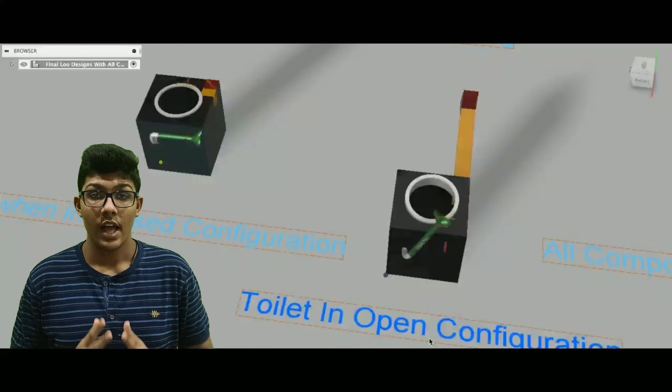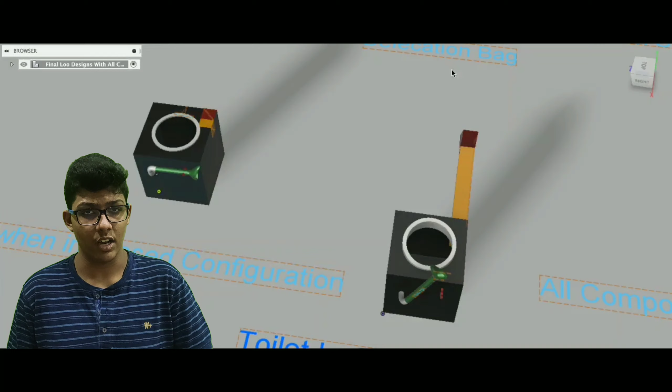I'm Satvik from Hyderabad, India, and this is my design, the in-house lunar waste disposal system. An innovative, austere, novel, genial, technologically advanced, yet simple to use attempt to design an efficient waste disposal system for future lunar manned missions. My design consists of mainly three units: the defecation unit, the regurgitation unit, and the urination unit. Now I'll detail them one by one.

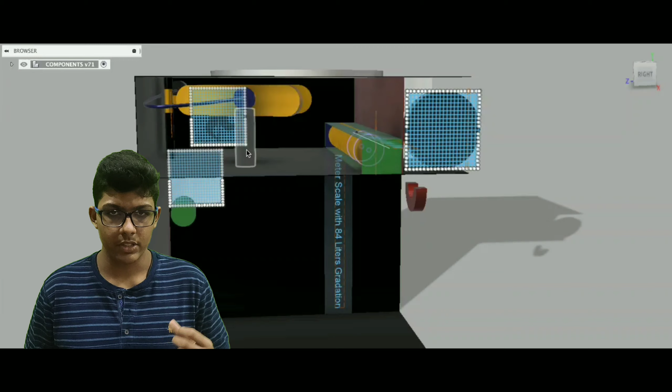The defecation unit consists of an in-house vacuum sealing technology to vacuum seal the defecation bag which is stored in that, and to make it compact, easy to store, and also keep it from any harm such as pressure, added atmospheric pressure, etc. The defecation unit, as you see, has a major component that is called the vacuum sealer. The vacuum sealer has some important parts like the vacuum nozzle, the seal initiation button, the retaliatory spring, the master arm, and the redundant arm.

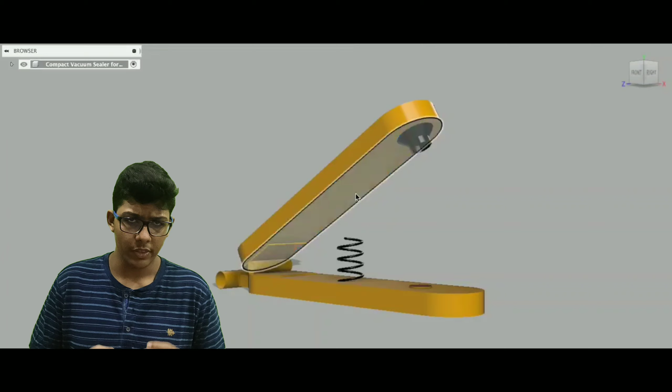The main function of the vacuum sealer is to vacuum seal the defecation bag, which is used to store the contents during defecation, and then make it compact and suck the air out so as to make it easy to store and as well as keep it away from any harm as detailed earlier.

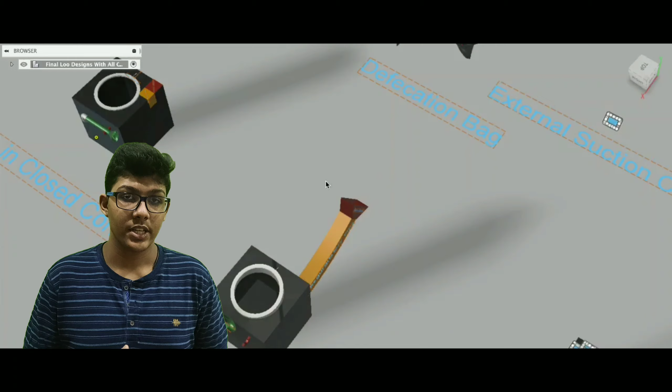Now let's move to the regurgitation unit. The regurgitation unit consists of a regurgitatory pipe and a sepsis opener and a storage box. The sepsis opener is attached to the regurgitatory pipe using a film release liner, almost like putting double tape on a wall. The main reason why a sepsis opener opens in that way is to accommodate the mouth of the astronaut regurgitating so as to not allow any spillages, and also make sure that it is closable and replaceable. Hence it has to be opened in the very same fashion shown in the pictures and in the 3D diagram.

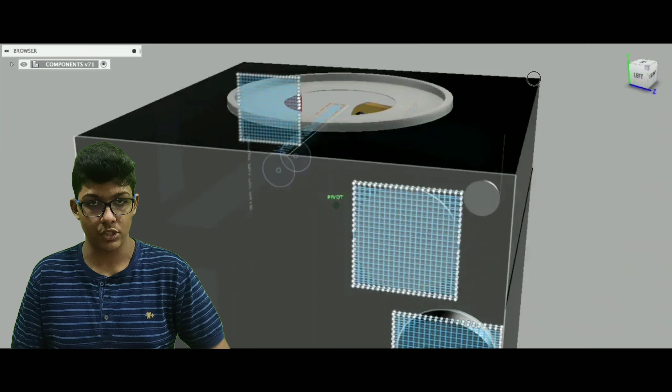The regurgitatory pipe opens directly into the storage box into which the regurgitated waste is stored, and then it has to be either extravehicularly disposed or stored inside the unit itself. Up to 3 packets can be stored inside the regurgitation unit.

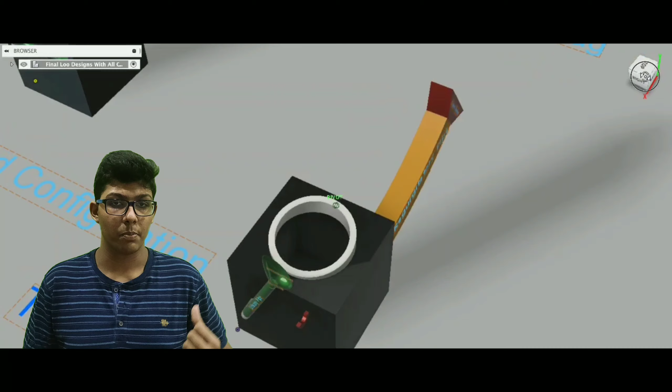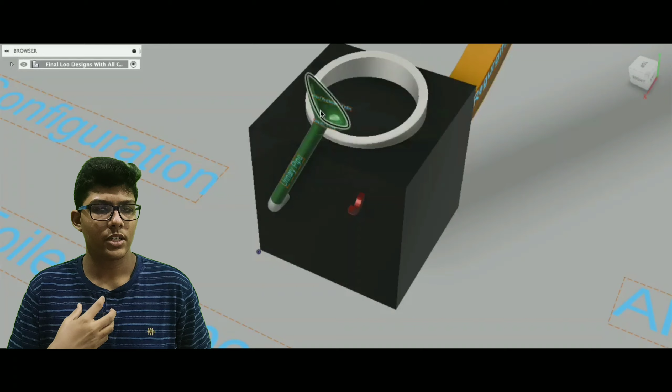Then let's go to the urination unit. The urination unit is the largest unit in my entire design. It consists of a urinary pipe, a urinary probe, and a urine stabilization unit. The urinary probe is basically a unisex probe, meaning it can be used by both men and women alike, and the probe does not need to be changed. However, it has an inner probe which has to be replaced after every use. It can be cleaned also, but I would suggest replacement because it might have certain microorganisms which might proliferate and endanger astronautic health. Hence, it has to be replaced after every use.

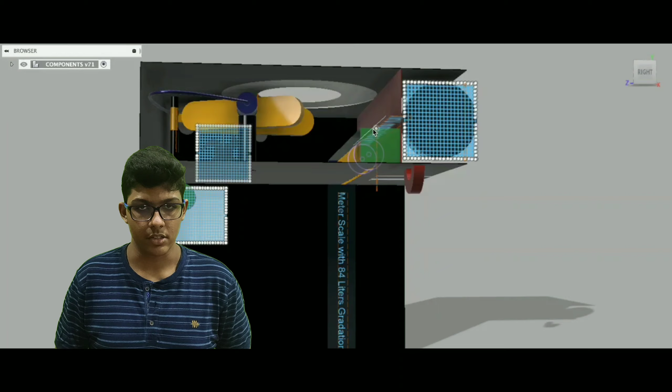The urinary pipe extends into the chamber. The chamber can store up to 84 liters for a 14-day mission. The pipe, as you see, has a wide part, which means that it can be extended up to 10 centimeters so as to make it more accessible and usable.

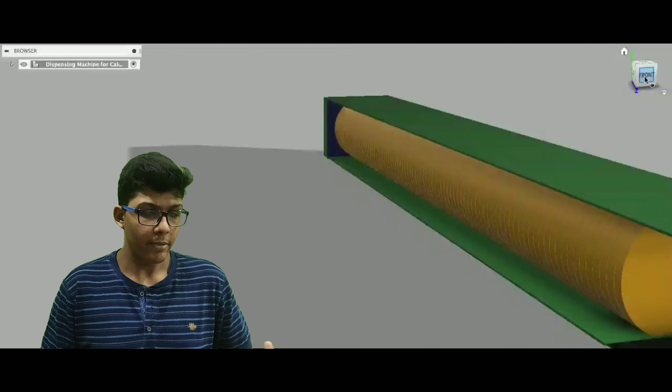The urine stabilization unit is an important factor because I have also cited it in the entire Word document that there is a study which says that calcium hydroxide powder can be used to stabilize active urine, thus killing any odor and also any contaminants in it. And it's recommended and mandated that 10 grams of calcium hydroxide be used for every 1 liter of active urine. And hence, keeping that principle in mind, the urine stabilization unit consists of 90 gelatin capsules which store at least 10 grams of calcium hydroxide in each.

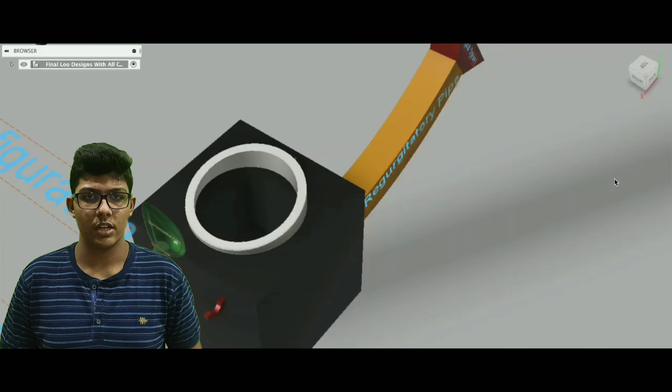The gelatin capsules were chosen because gelatin dissolves only in water, and since urine is 95% water, it is easy to use and also dissolves only in water and not any other solvent, thus keeping the contents inside it safe. The calcium hydroxide dissolves in the urine, stabilizes it, and also makes sure that astronaut health is safe from any biological hazard.

Having detailed each and every part of my entire design, the total weight of my design stands at just 15.028 kg. And when I come to acoustic efficiency and power, acoustic efficiency depends on the fans because the exhaust fans are the only mechanical parts which produce sound. The vacuum sealer itself produces negligible sound.

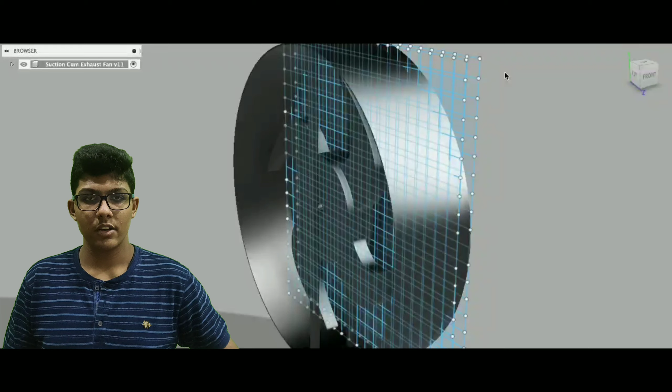The sound produced can be calculated by the formula which I have attached in the Word document, but it also depends on certain factors which have to be given by the fan manufacturer. Hence, I have detailed the formula below because it also depends on who is manufacturing the fan and what is the effective decibel power, etc.

The acoustic efficiency of graphene is very high, as I have cited in a study that graphene has robust acoustic shielding and acoustic efficiency, which means you don't need to add any other material or any inhibitant to make sure that sound is shielded, making it a very good acoustic shielder.

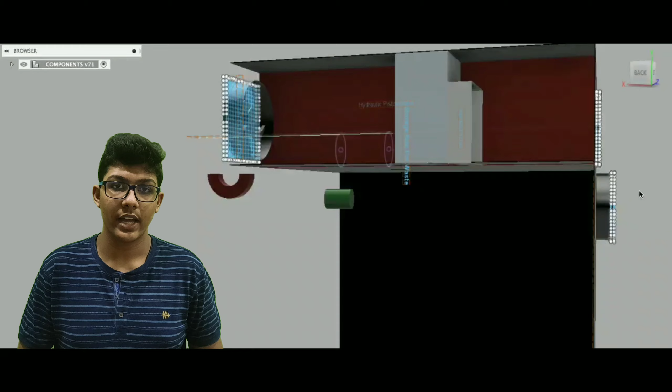Now when we come to the safety part, I have detailed it very well in the safety part of the submission form about how my design keeps safety as a major priority and also addresses safety issues like electromechanical hazards, biological hazards, chemical hazards, hazards caused by menses, hazards caused by urine, the defecation bag itself, diarrhea, etc. Hence you can also read it from there.

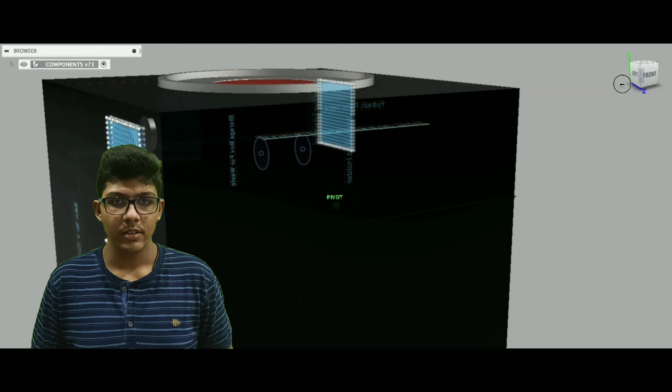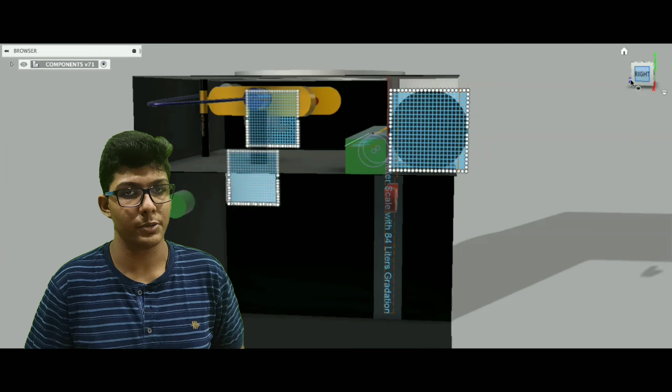Now I'll detail how my design works in microgravity and lunar gravity. Microgravity is defined as gravity which has very weak forces compared to that of the Earth's gravity. Now in microgravity, as we've observed, things expelled out float. Hence, to prevent that issue or to utilize it, I have placed 3 exhaust fans for each of the units. The exhaust fans are made of a plastic casing with a mesh which contains an active charcoal sheet reinforced between them. The mesh is the blue colored lines.

The urinary unit's exhaust fan is a little different because it protrudes to the outside and it is reinforced with a sheet of Gore-Tex from the inside. The Gore-Tex's main function is to allow only air and not liquid into the fan, thus preventing the liquid from seeping into the fan and also preventing any electromechanical failure. These fans produce suction which pulls down all the objects towards them so as to make sure that anything expelled falls down directly into the toilet itself.

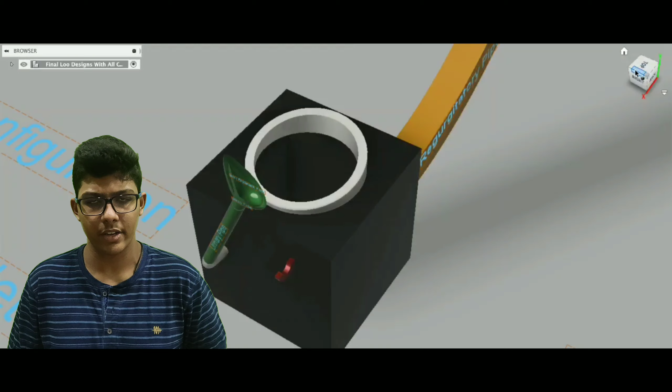In lunar gravity, it won't be an issue because it has been detailed in many places that lunar gravity is strong enough to pull down any material expelled. Hence, there is no need for any mechanism to make sure that particles fall down, and hence it is really easy for the toilet to function in a lunar-based environment.